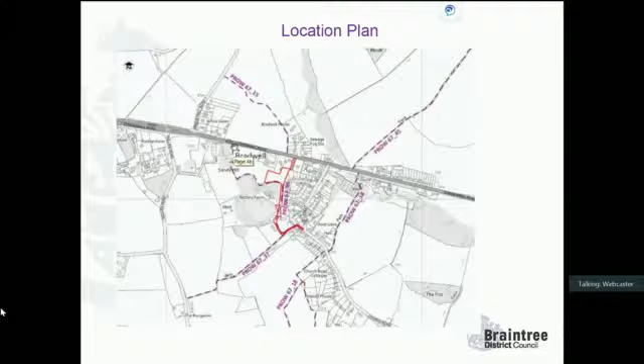In terms of the location plan, a larger view showing context - these are properties here that front onto Coggeshall Road. The location of the housing would be in this portion of the site, with existing properties in Forge Crescent and Chapel Rise to the east.

In terms of the site layout, layout is sought at this stage. There are 6 units altogether. Plot 1 is proposed to be a bungalow, and then you've got 2 four-bed detached houses and 3 two-bed terraced houses. All of the properties meet the requirements in terms of garden size, back-to-back distances, and are all served with parking to meet the adopted standard.

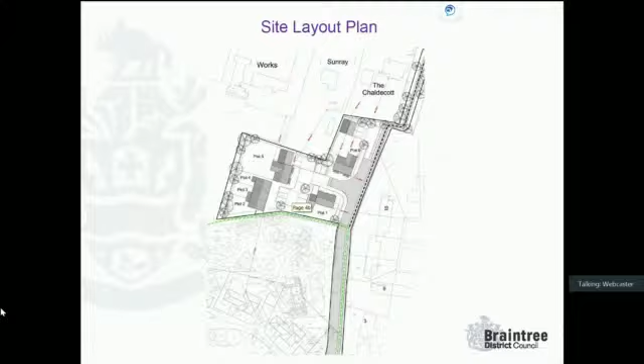This layout shows the same as before, but as part of the officer report, you will see that there is an outline planning permission just to the south of the site for 3 units. That was granted on appeal, and it remains extant.

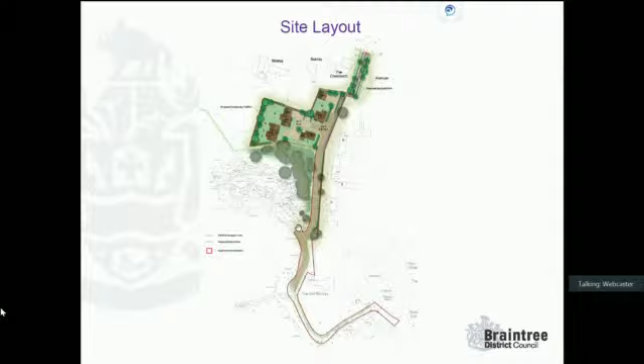In terms of highways, Coggeshall Road is this side of the site. They're proposing a 2-metre wide footpath that will link up to the footpath along Coggeshall Road. The public rights of way, shown here in green, would remain unobstructed, and the new formal footpath would run all the way up the access and then connect to the pedestrian access out onto Coggeshall Road.

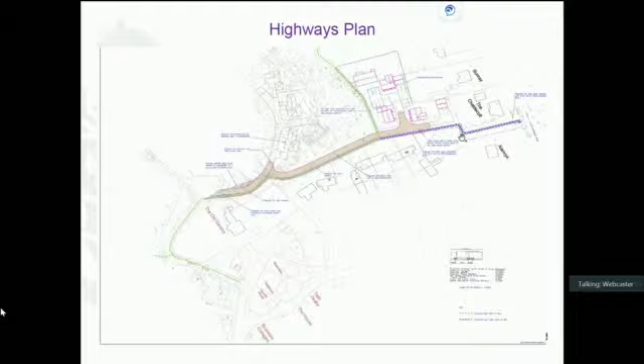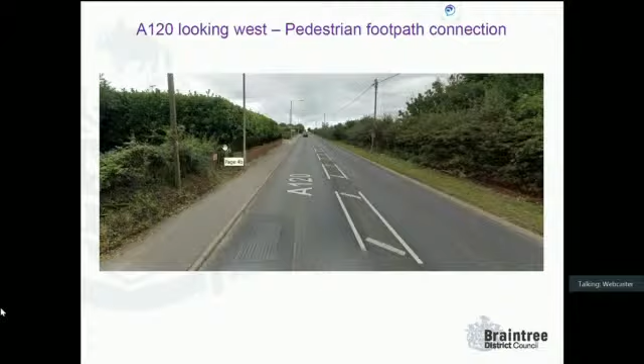In terms of where the public footpath would connect, this is a view looking west along the A120 along Coggeshall Road, so the footpath connection would be approximately at this point. Taking a view further back, this is the junction with Riverside, and the pedestrian access at the point where the red line is shown. Looking the other way, east along Coggeshall Road, again showing the location of the proposed pedestrian access.

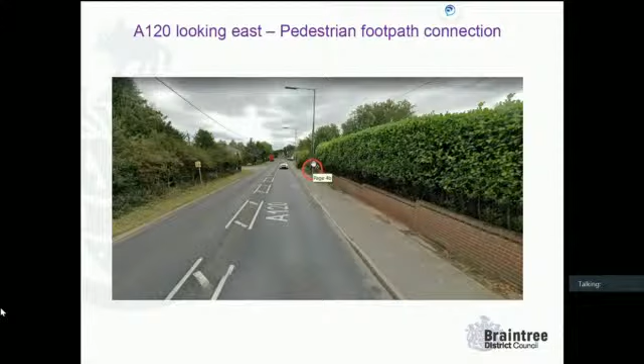In terms of the planning balance and recommendation, there is a conflict with the development plan and the Section 2 plan, given the site is located in the countryside, so it's beyond the settlement boundary, albeit adjacent to it.

What we do have to consider is Policy 7 of the neighbourhood plan, which forms part of the development plan, which does allow for small-scale residential development beyond the settlement boundary as an exception, where it can demonstrate significant contribution towards maintaining the future viability and sustainability of the settlement, and also where such sites are located next to a settlement and don't provide for linear extension. In this case, officers would consider it is adjacent to a settlement boundary, and we don't consider it to be a form of linear development.

There are 6 units, which is not insignificant. It would help to maintain the future viability of the settlement, with extra residents using public transport and the facilities available in the immediate location. There are limited facilities in Bradwell, but there is provision of bus stops offering onward connections.

When the planning inspector was considering the sites to the south, they concluded that although private car journeys would be generated from the development, it would not be wholly reliant on the use of the private car, with other sustainable modes of transport available within acceptable distances of the site, and there's no reason why we would take a different view for this site. Also, the pedestrian access through to Coggeshall Road makes that a bit easier. There are no highway concerns for either pedestrian or vehicular access, with both National Highways and Essex County Council having been consulted and raising no objection.

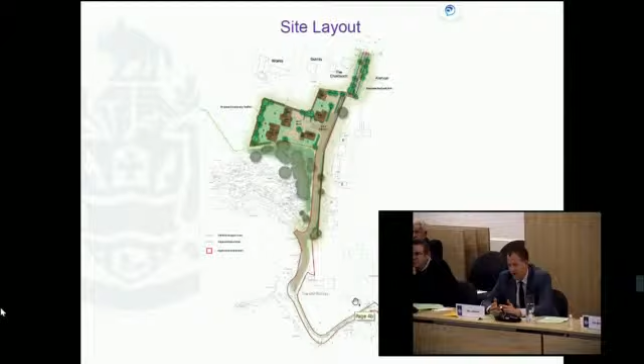Thank you. My interpretation of linear would be like a ribbon along the road. So, for example, if it started here and then you had one by one that followed the road round. This is more like an enclave or a group of housing. It doesn't follow the road, which is what a linear fashion would be.

Okay. Does anyone else wish to raise or mention any other point? I think Councillor Abbott - it's been moved and seconded. Our officers agreeing we can have some form of wording to strengthen the construction access issue. Yes.

It has been moved by Councillor Mrs Spray and seconded by Councillor Mann with the additional condition regarding the construction traffic requirement notice or agreement with officers. All those in favour? Those against? One against. So that application has been granted.

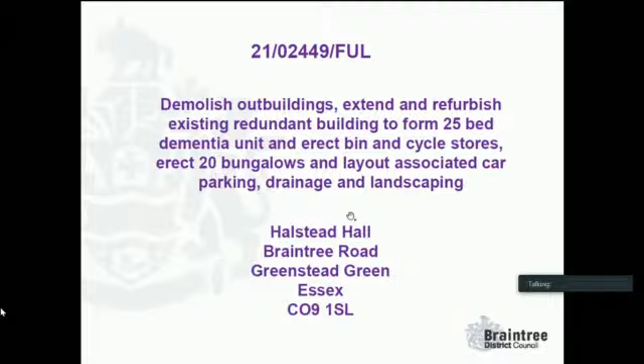So this first slide is the site location plan. It looks better on my screen than yours. I do apologise. I wonder if we can turn the lights down a bit more. I have to ask you to do it because it looks a bit technical, that light switch.

Any better? Shows it up a little bit better. So the application site is ringed in red.

To the north of the site is Halstead Hall, the existing care home. To the left is the property known as Green Lodge, referred to within the committee report, and the land in blue is other land owned by the applicant. To the right is the existing development on the Oak Road site, the Bloor Homes portion. We can make out Marler Road here, Hurrell Close here, and Oak Road is just off the page up here.

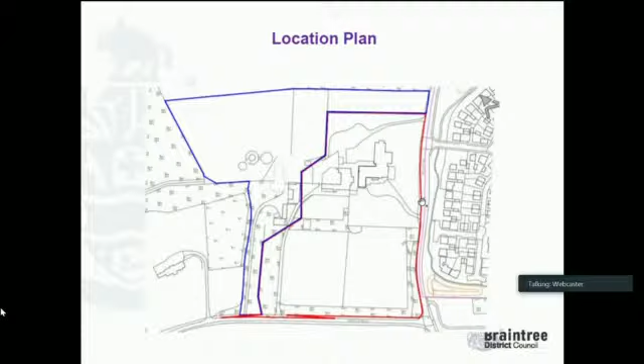To the south, running directly to the right-hand side of the application site, is the A131, which runs to Halstead in one direction and Braintree in the other.

This next slide shows a site plan of the proposals, taking the works to Green Lodge. You can make out the existing footprint of Green Lodge, broadly an L shape, with proposed extensions that will close in the building and create a courtyard within the middle.

We have 2 areas of new car parking, and within the more open portion of the site, during the life of the application, the number of dwellings proposed has been reduced from 30 to 20, with some other amendments to layout. This has meant that all back-to-back distances now comply with the Essex Design Guide, and all properties have the relevant amount of private garden space and off-street car parking.

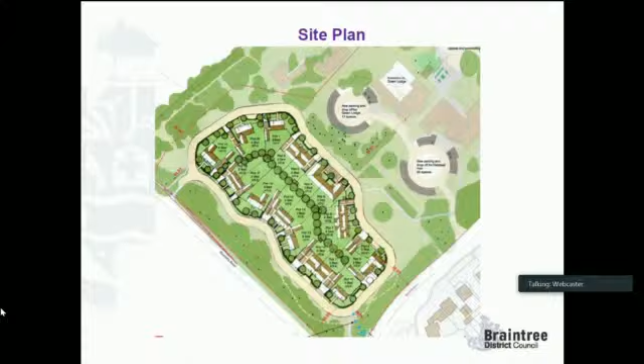The next two slides show different site accesses. The first is the site access onto the site from Russell's Road, with the relevant visibility splays shown, and highways were satisfied with the access arrangements here.

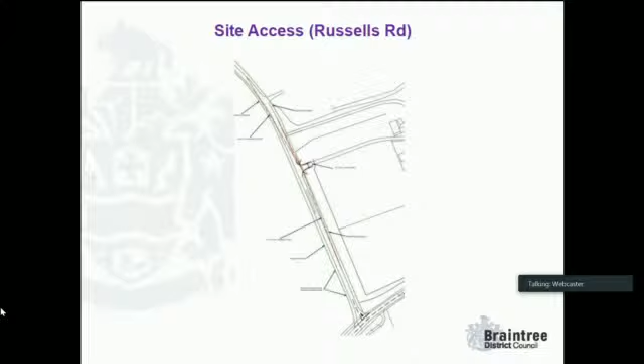They also raised concerns about the additional capacity at the access between Russell's Road and the A131, and again, visibility splays were demonstrated by the applicant to show that vehicles could exit Russell's Road in a safe fashion.

The next few slides show details of the proposed dwellings. We've got floor plans of 4 of the dwellings here, plots 2, 3, 11 and 12 - 2 pairs of semi-detached properties, with elevations shown. These ones are bungalows.

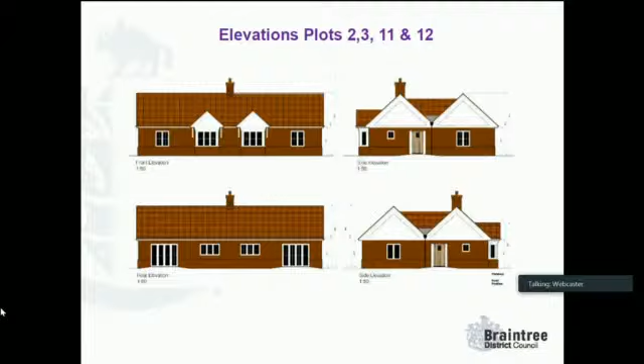The next slide shows the larger bungalows, plots 6 and 7, and again the relevant elevations.

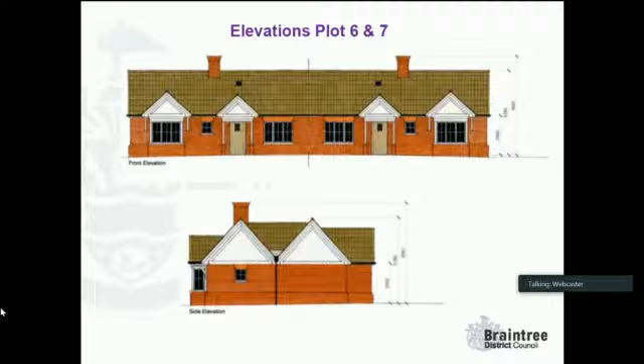The next slides show the floor plans for the 1.5 storey properties, plots 1, 9, 10 and 13. We can see they're 3-bedroom properties, with the corresponding elevations.

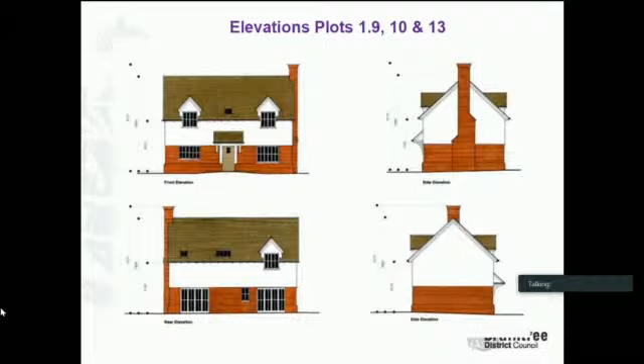These are the largest properties on the site, again 1.5 storey, with the corresponding elevations.

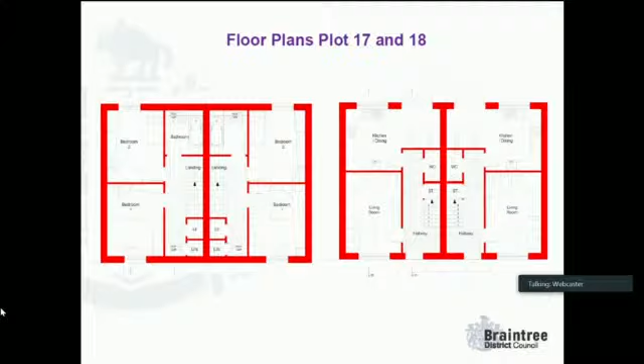This is a pair of houses, properties 17 and 18, which are 2-bedroom, 1.5 storey properties, and the corresponding elevations there.

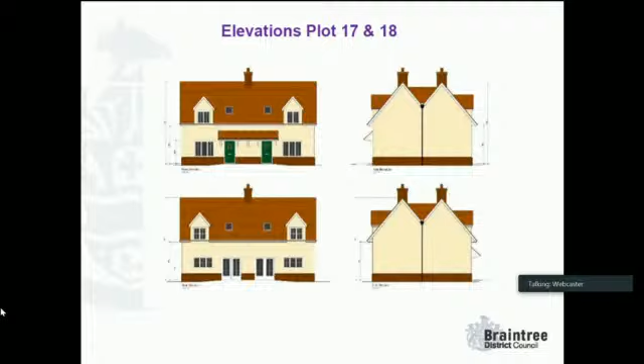This next slide shows the front elevation, which will broadly stay the same, and then the 2 side elevations, and this new rear elevation, which joins up the 2 corners of the building.

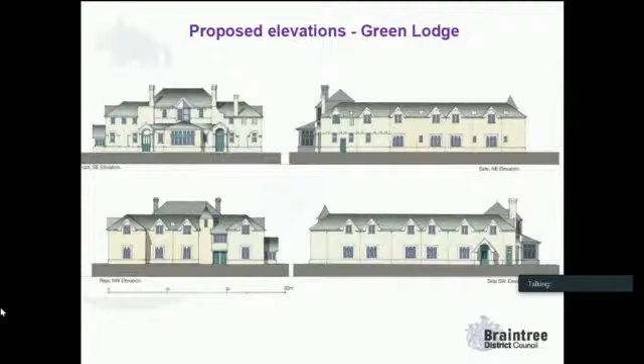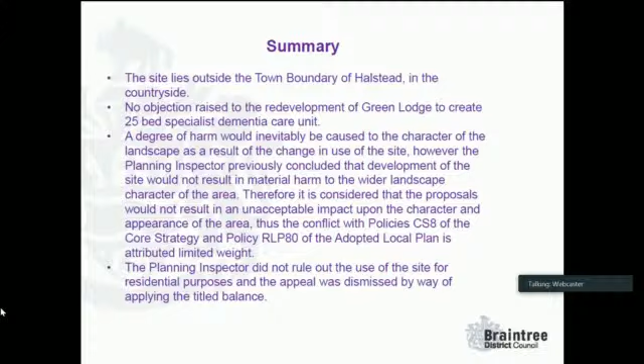The planning inspector did not rule out the use of the site for residential purposes, and the appeal was dismissed by way of applying the tilted balance. The council can currently demonstrate a 5-year land supply, albeit marginally, and there is a need to maintain this supply.

In light of the planning inspector's previous conclusions, and given the adverse impacts previously identified by the inspector have now been overcome, it's considered that when applying the flat planning balance, it is recommended that planning permission is granted for the proposal. This is against the context only of moderate weight being given to the conflict with RLP2, and given that the proposal does not wholly conflict with CS5 of the core strategy, given that the inspector did not rule out the site for residential purposes.

Happy to answer any questions.

Thank you, Mel, thank you very much indeed. Members, I could just about see you all. Oh, should I turn that back up? A little bit, please, it would help. I think it might help me a bit. Councillor Radley. Monday, sorry, I can't see your name. I was going to say, Councillor Radley is definitely not here this evening. No, sorry, thank you, Chair.

First and foremost, I do have a question that one of the speakers brought up, about the permission to grant the dementia care unit, but there's no weight given to the district council actually making that proposal come to fruition. So this is saying that we could grant a 25-bed dementia care unit, but it may not be built. I don't understand where our authority can grant something but not have any reflection to make it come to fruition, and therefore why are we even considering it.

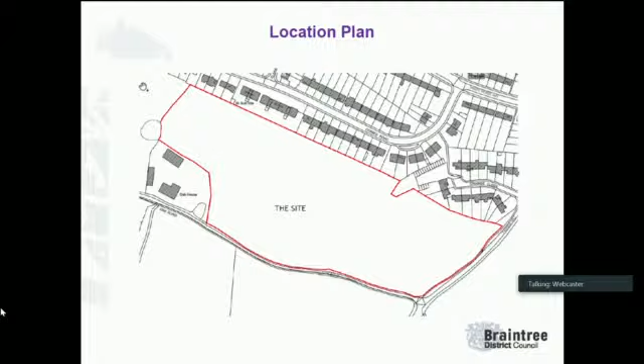So this is the application site. Oak Road runs along the south boundary of the site. This is Tidings Hill, which Councillor Pell referred to, where vehicular access will be formed from. And then you can see the existing edge of the town. We've got Coney's Road and Grange Close just to the north. This is farmland further to the east on the other side of Tidings Hill and to the south of Oak Road. Oak House here is a residential property which has also got a spa building at the back, so there's a business running from there. And then this is an undeveloped field to the west here.

So the site location, the site is on the southern edge of Halstead. What this plan doesn't pick up is the development on Oak Road, which Councillor Beavis mentioned earlier. This was a scheme which was approved, obtained by Gladman, and has been built out by Bloor and David Wilson. So that's the town moving to the south already.

This site, as you've seen from the report, already has an outline permission. Usually what we'd expect is an outline permission is granted and then a developer comes along with reserved matters. What's happened with this particular application is the applicant who purchased the site following the grant of outline permission looked at the site's capacity, felt there was scope to increase the numbers to make efficient use of the site in an acceptable manner, and that's why a full application has been made. So whilst we're mindful of the outline permission that was granted previously, this is a full application with all details. We're not relying on the outline permission.

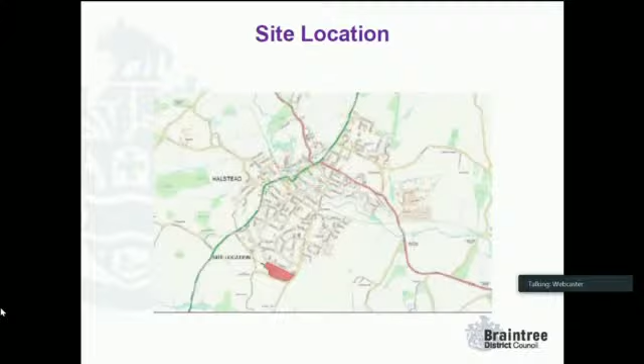This is the site plan. Again, just for bearings, this is Oak House over here, and this is the spa building just at the back here. There's quite a strong, tall conifer hedge running around the edge of the Oak House boundary, and an existing hedge running along the southern boundary here. No vehicular access is being proposed onto Oak Road.

This is the vehicular access point here off Tidings Hill. There's an additional pedestrian connection which we're looking to form off the garage court off Grange Close, to provide additional connectivity. There's also potential for a connection to the west should that site come forward in the future. But this is the development, so you can see effectively two parcels, with a field boundary running down the middle here. The road comes in, parcel 1 is here as a development, and then parcel 2 is on the western side of the boundary.

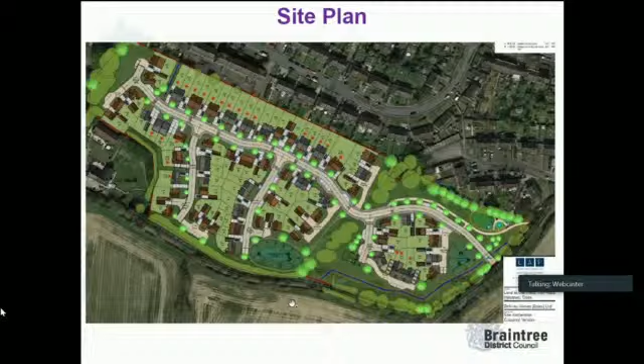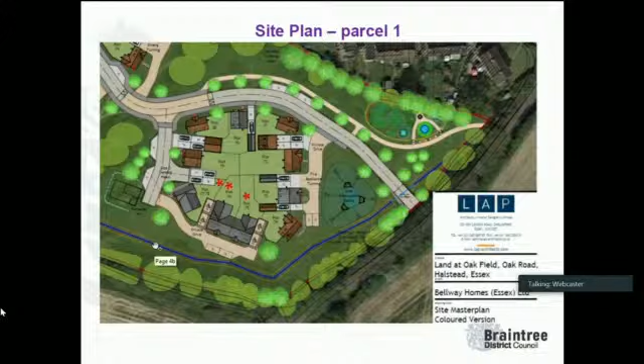There's been a very healthy discussion about what the NPPF is talking about in terms of tree-lined streets. Certainly officers took a different view to the developer, but the resulting scheme is one which we're both comfortable with, and we both think complies with and is appropriate and provides a different sense of character and appearance as you move through the development.

The trees are all to be either in land which will be owned and managed by the Highway Authority or by the management company. So these aren't trees which are within, we're not relying on street trees being within people's gardens where they may be removed in the future. So we're consistent with the NPPF there, which says where street trees are provided, there needs to be suitable long-term management arrangements for them.

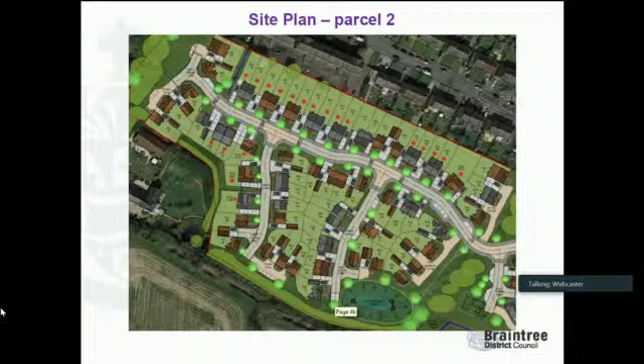Affordable housing is being provided, 28 homes being provided. That's 35% of the total number on the site. Ordinarily, on a site on the edge of a town like this, we'd be looking at 30% provision. The outline permission was granted on the basis of 40% provision. So 35% is over the level which we would usually seek, but less in terms of a percentage than was secured with the outline permission.

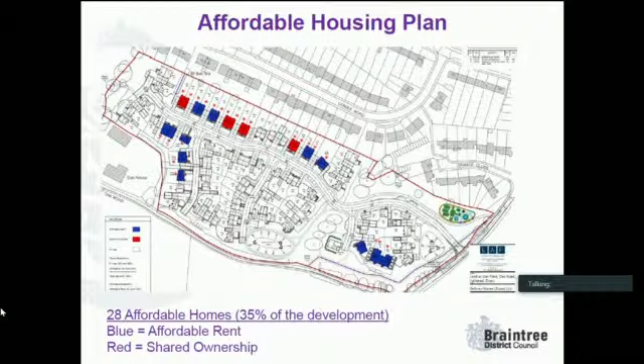Although if the lower number of dwellings which was permitted by the outline permission, which was 70, was to be built with 40% provision, that would be 28 affordable homes. But as you can see here, we've got a mix of shared ownership and affordable rent spread through the site, which the Affordable Housing Officer is happy with, and the affordable housing mix is agreed.

There's a lot of house types, as you'll have seen looking on the website, so I haven't tried to show them all on the presentation because it would take quite a long time. But just as a sort of flavour, I've got some 1, 2, 3 and 4 bed properties just to show.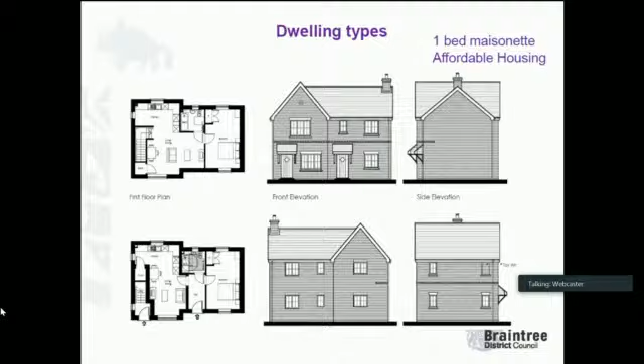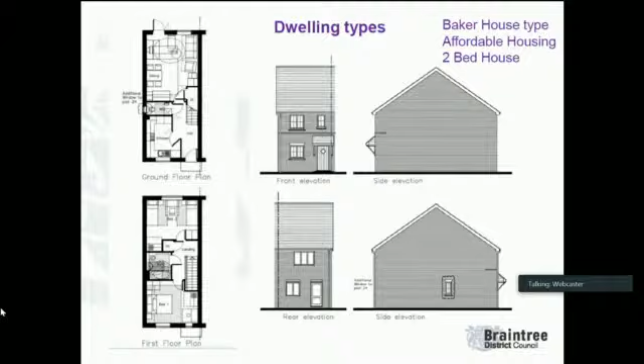So these are the 1 bed flats which have been provided as affordable housing. These are 2 bed flats, again part of the affordable housing provision. There's a couple of different types of this - one version where we've got render to the front with brick quoining, but there's also just brick versions. And this is a 2 bed house, again part of the affordable housing provision.

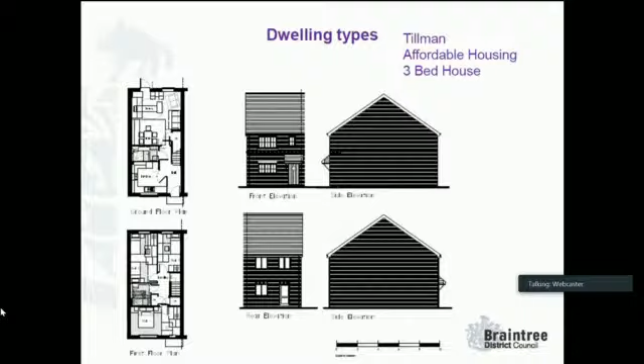And then 3 bed property is just an example. That's one of the market properties. That's the same house type, but that's got a weatherboarded front compared to that one, which is brick. 3 bed semi-detached houses. And then we've got 3 bed affordable house, just an example.

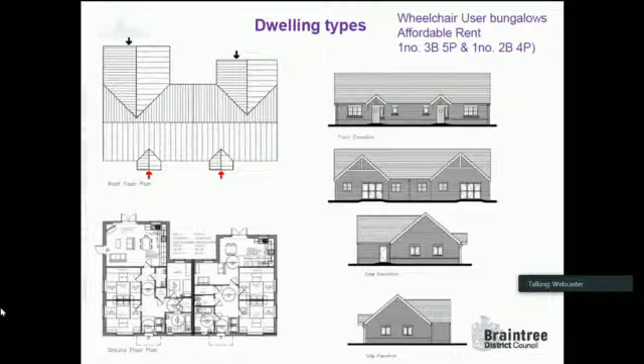Bungalows. So we've got 2 market bungalows for sale, which are 3 bed units. That's unusual to be having a developer which is offering bungalows for market sale. And then we've got 2 wheelchair user dwellings as well, bungalows, 1 3 bed and 1 2 bed, helping to meet the need for that particular type of property.

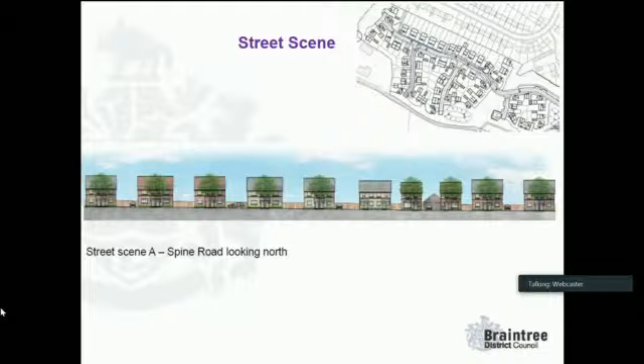So there's a number of street scenes which have been provided, which attempt to give a visualisation of what the streets would look like and the houses together. So this is looking along the northern boundary, along the Spine Road, looking along the top here. And then this is the south side of the same street.

Then we've got the shared surface street. This is looking to the east. And the private drive looking west, so if you're looking from the open space here, looking back into the site. Just to point out, that bungalow there is that bungalow here.

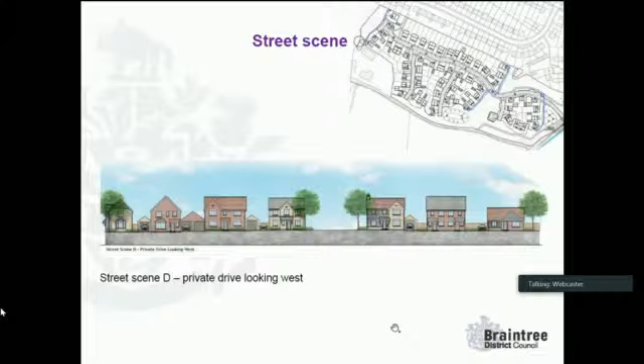So officers were concerned about properties being constructed too close to the backs of the properties on Coney's Road. So where there's a particular sensitivity here, these 2 properties are the market sale bungalows which I referred to. And then this is the private drive on the eastern boundary as well.

And then these are some CGIs which the applicant's provided. So this is standing on the footway coming into the site with the play area on the right-hand side. And this is sort of parcel 1 here. You can see the street trees planted running along both sides of the road.

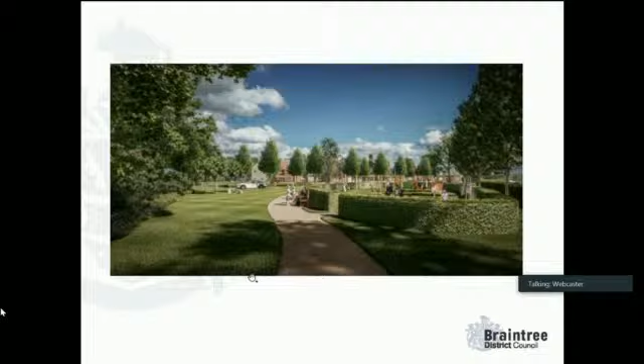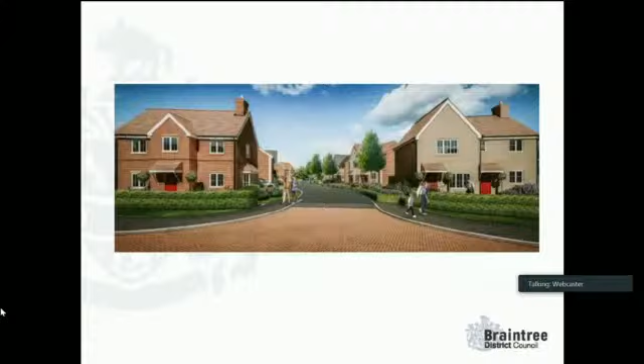This is one from the SuDS basin, so this is in parcel 2, sort of at the bottom of the site, looking up. So this is the road running through between parcel 1 and 2. This is the houses looking at the open space. And these are some other images of the streets as we move through - you'll see the street trees here on the main street and lower order streets here.

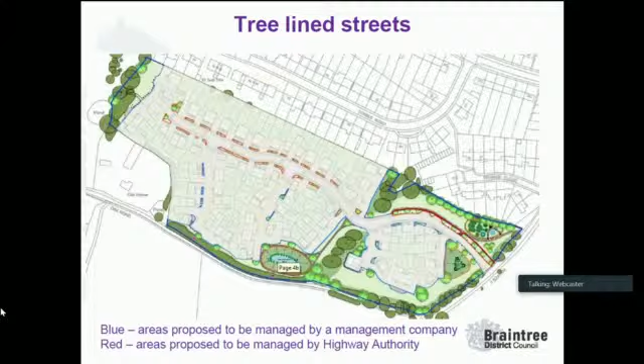So in terms of the access of Tidings Hill, obviously this was our starting point in terms of discussions with the developer. When we looked at the access, it wasn't approved as part of the outline, but indicative or illustrative information was provided. An access was shown which showed 7 trees being removed on Tidings Hill for a number of reasons, including the excavation of the ditch opposite by the farmer, which they were entitled to do, but which impacted the ability of the road being widened.

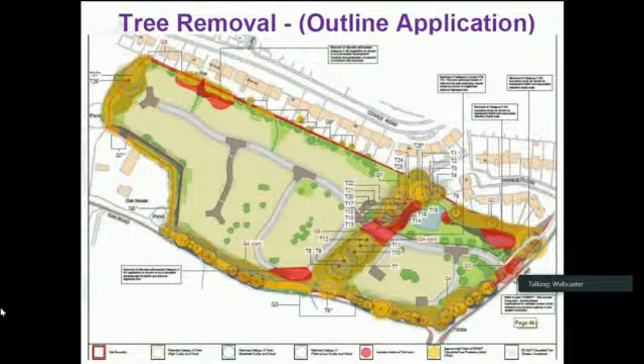We've had to reconsider how the access is formed, and as the agent who spoke at question time referred, a number of different locations have been looked at along Tidings Hill to try and find a solution which works in terms of highway safety, providing suitable visibility along the road, but also minimising the loss of trees. So whereas the outline permission envisaged the loss of 7 trees, regrettably 9 trees would be lost as part of this proposal now before us.

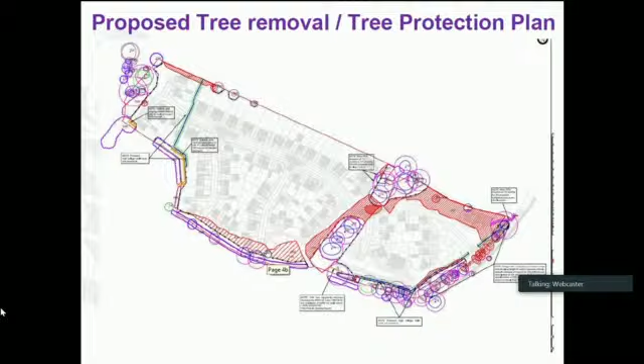So this is the tree removal plan, tree protection plan. You can see the red areas are the trees or areas of vegetation being removed. We've tried to set out within the committee report in more detail what is being removed, being clear where we can about the larger trees, the identified trees. But there are also some groups of vegetation proposed to be removed. Mindful that members want a good understanding of what is being removed, the applicant has provided additional information to show what some of this vegetation is.

So what we're looking at here, for example at the back of Grange Close, is predominantly blackthorn and hawthorn scrub which will be removed. Along here we've got self-seeded scrub at the back of the hedge which will also be removed. We've tried to be as clear as we can in the committee report about what is being removed.

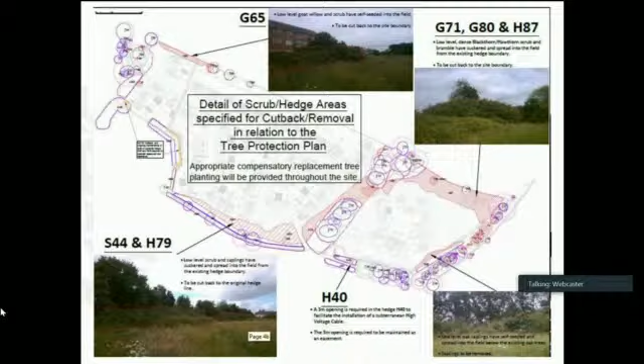So this is the southern boundary, which I think was being referred to, with additional planting there being planted along there. I'd have to say, having been out, I think there are some gaps - they're not great from my recollection from being out earlier today and previously, but there are some gaps.

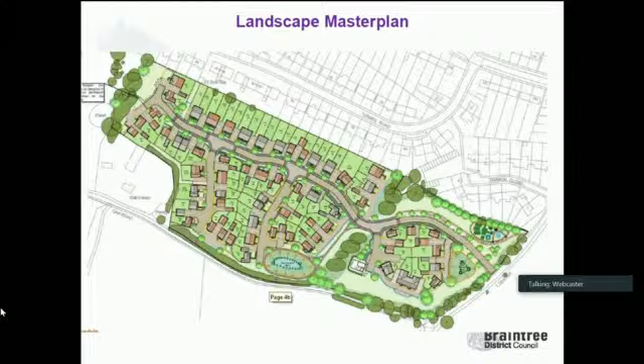We do have a landscaping condition, condition 28, which would provide the detailed landscaping planting, building on the master plan. If members were particularly concerned about that southern boundary, given the concerns raised by the Parish Council, we could certainly put an informative on which says we'd expect to see additional planting to plant up any gaps along that boundary, and also to think about the planting put there, because the point was raised about screening during winter months, so perhaps more evergreen planting could be considered as part of a native mix. But there's certainly a condition already that covers landscaping.

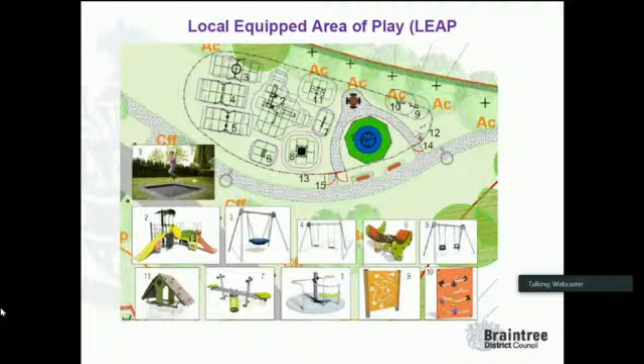This is the play area that's proposed. The Town Council did raise concerns as part of their earlier representation about accessible play equipment, and the applicant has amended some of the play equipment to provide more accessible pieces. So we're broadly happy with what's proposed there.

So one was with regards to this application was quite long, so I do apologise for its length and also that it came out today. But I will spend a couple of minutes going through that just to make sure everybody's aware.

Firstly, a correction in our report. I'm afraid to say we've incorrectly reported the status in the emerging local plan. We said it wasn't included within the Section 2 plan. It wasn't included in the version that went out for publication and was consulted on, but it has been included as part of the main modifications. So where we've said there was a conflict with the Section 2 plan, which we said was neutral in weight because of the outline permission, actually we need to acknowledge that this is included within the Section 2 plan - not part of the adopted plan still, because Section 2 hasn't been adopted, but part of the emerging plan. So that neutral harm or benefit is probably more of a benefit by virtue of the fact this is a site proposed to be allocated.

And then in terms of other conditions, we're proposing to remove condition 3, which was the archaeology condition. The site investigation has been done and we hadn't received a report concluding what was found. That has now been provided and approved, so we don't need that condition anymore.

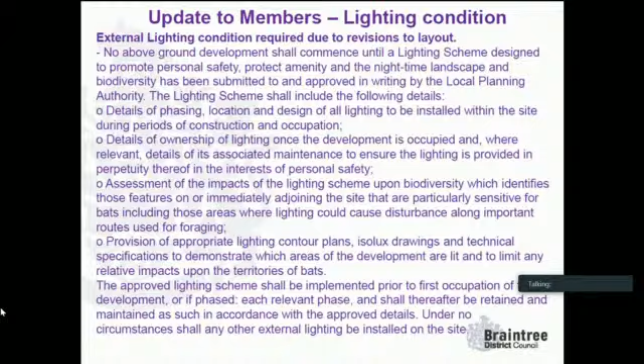We need to add, we recommend adding, an external lighting condition. We did have an external lighting scheme provided which we're broadly happy with. The layout has changed slightly, but the lighting scheme hasn't changed with it. So we need to make sure we've got a correct lighting scheme for the layout we're looking to approve. So we recommend adding an external lighting condition.

And then just some typos, I'm afraid, on some of the approved plans listed. We haven't changed what's on the website, we're just updating how we've recorded them on the approved plans list. So apologies for all of those.

And then we did say we would update members on a couple of points regarding financial contributions. We can confirm what the outdoor sport contribution will be and the allotment contribution, now we've re-indexed those. There's also a minor point about how we're drafting the library's contribution - it doesn't affect the total amount to be paid if 80 dwellings are built, but just for completeness we're reporting that because the county council want the obligations set out slightly differently.

Within the agreement, we're also recommending we add a refuse collection obligation, which makes sure the operations team at the council can go onto the estate roads and collect refuse, having the right to do that, and that if any damage is done to the private roads where we use them reasonably, we won't be held liable for that. So that's an additional obligation we've added.

So just quickly, in terms of harms and benefits: we still have that conflict with the adopted development plan, conflicting with RLP2 and CS5. But as we've updated you, the conflict isn't there with Section 2 because it's proposed to be included through the main modifications. So assuming that happens, it will be part of the emerging plan. We previously reported this harm as neutral - as I said, arguably it should be seen as a benefit in terms of the site coming forward as part of the Section 2 plan, so delivery of a plan which we've allocated or will be allocating for development.

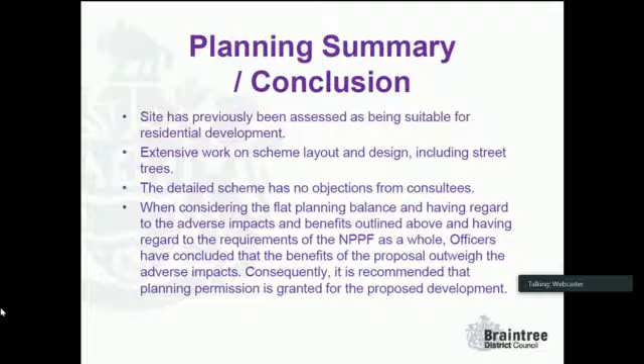Thank you, Neil, for a very detailed presentation, especially with all the additional information we've received this afternoon. Members, I'll get it right this time. Councillor Monday. Thank you, Chair.

First of all, I have to acknowledge that there is outline permission for 70 homes on this site, so the precedent for building is there. I'm not going to argue against that. I just have a question: the outline had 40% of those 70 homes as affordable, yet now we have the same 28 affordable homes, in effect, on 80 houses. What's changed? Why was the precedent set at 40% and now it's down to 35? Why did the planning authority not take 40% and make it 32 homes? Just a question. All I can see here is 10 extra homes for the developer to make a substantial profit on.

I do acknowledge Councillor Powell's statement that Tidings Hill is really narrow. It is not a very good road to traverse up or down, and I worry about the amount of construction traffic going up and down Tidings Hill, which I consider quite dangerous. I accept that 70 homes for outline has already been granted, so there's not much we can do about that. There will be construction traffic, but I wonder how you're going to ensure that traffic goes down Tidings Hill, because it certainly can't come through Oak Road.

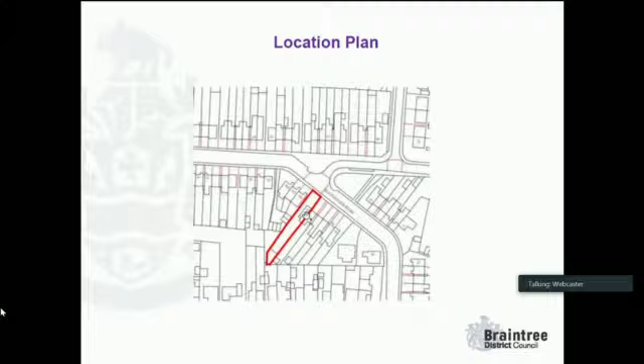These are the existing floor plans of the property - looks better on that one. We've got 2 bedrooms upstairs and a bathroom, and the bathroom at the moment sits within a cat slide roof, which will become more apparent when we look at the photographs.

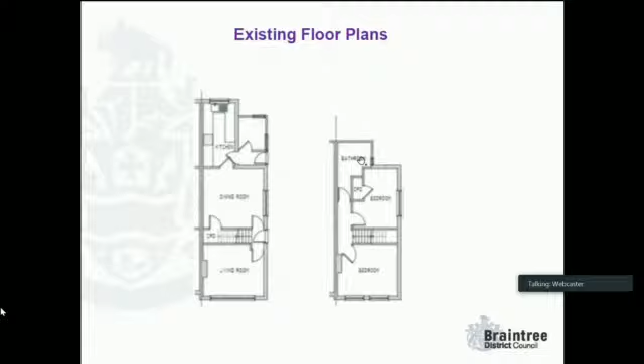These are the existing elevations. So that bathroom I was talking about sits in this space here, in the cat slide roof that drops down.

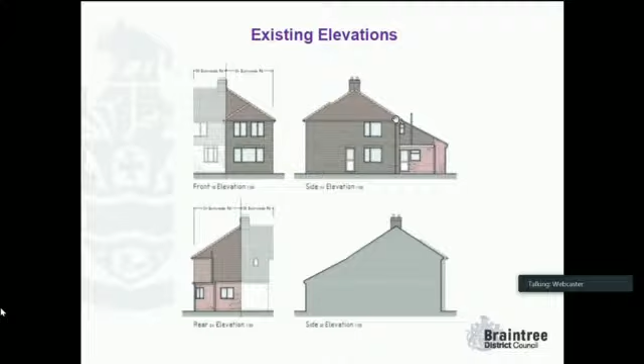The proposed elevations - this is the proposed first floor extension, and then we have a single storey extension that extends out along the boundary with the neighbouring property.

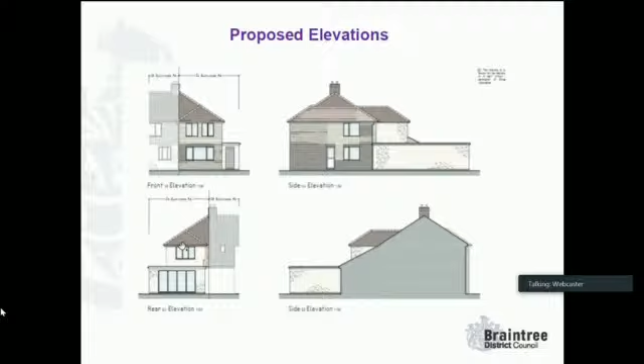This is the view from the rear. Again we can see the first floor extension here that will accommodate the second bedroom, which will be slightly larger. There isn't actually an increase in bedrooms, it's a reorganisation of the first floor, as this plan shows - the large open plan living kitchen area at the back of the property, and upstairs the bathroom moves to a central position, and bedroom 1 becomes slightly larger at the back, but it still maintains just those 2 bedrooms upstairs.

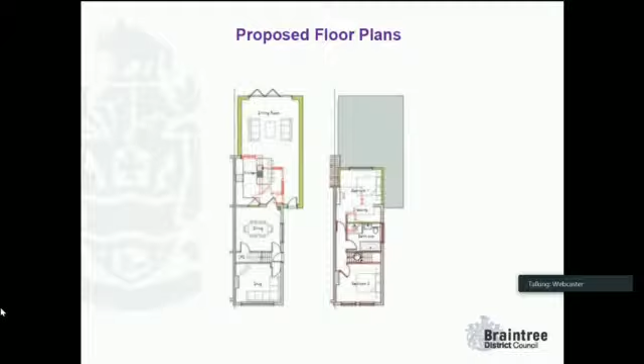Officers consider that the proposed extensions are of an appropriate size, scale and design and layout, and would be in keeping with the character and appearance of the existing property and those within the locality. No detrimental impact would occur to neighbouring residential amenity or highway matters. Officers conclude that the proposed extensions would be acceptable, and it's recommended that planning permission is granted.

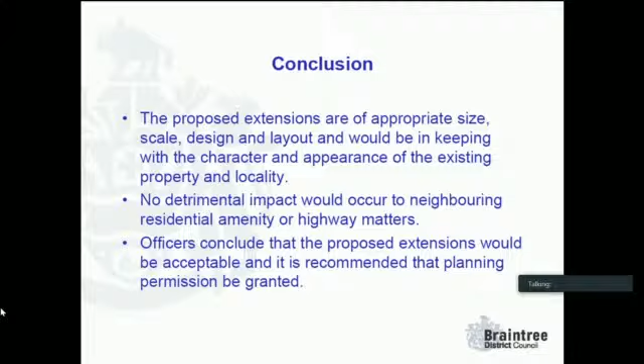Councillor Ms. Parker: Thank you, Madam Chair. Thank you for the presentation. It seems to me that often with these sorts of applications, the main issues are whether there's any impact on the neighbours, particularly when you have a semi-detached, and also whether there's any sort of adverse impact on the character of the street scene and the property itself. I think in both those respects, perfectly acceptable, so I'm happy to move approval.

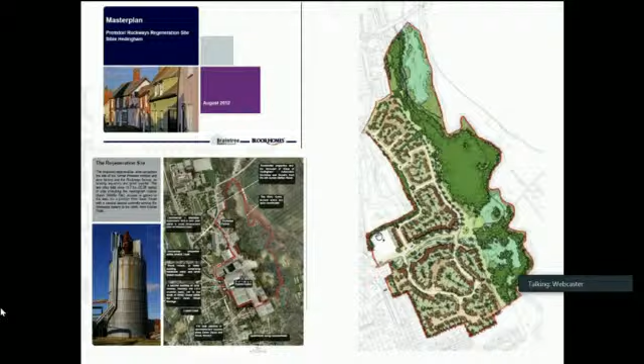In terms of status of the site, a master plan was approved prior to the permission for the redevelopment of the site, as part of our supplementary planning guidance. We've got a master plan document which identifies the land in white for that community use, as they termed it, the medical centre and employment use. You can see the extent of the previous factory site has all been built out now, redeveloped as housing. This is the last part of the overall factory site to be redeveloped.

This is the work hub, in terms of its surroundings. This is the building, a two-storey building, a prominent gateway feature coming into the site. The medical centre site is this bit around the back off Osier Way, and this bit off Bewick Court here.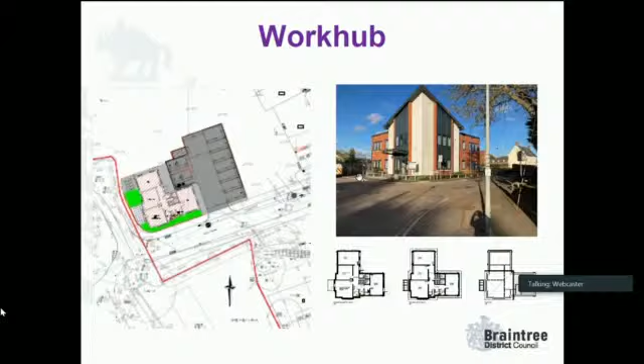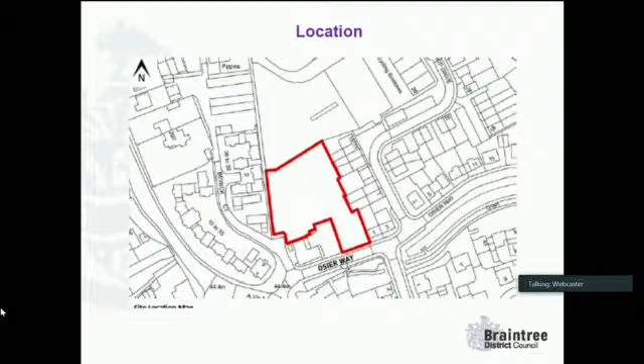In terms of important issues we need to cover, at question time Mr Ward referred to the red line and the public highway. If I flip back to the location plan, you can see the red line adjoins Osier Way and Bewick Court. Mr Ward was quite right.

Osier Way isn't adopted public highway. We've checked with highway officers this afternoon. It's still in the process of being adopted, so not all of the estate roads are in that process at the moment. But certainly this part of Osier Way is, though as it stands it's not public highway. However, the red line does adjoin Bewick Court. In terms of validity of the planning application, we think this is okay, and the red line does provide access onto the public highway.

In terms of the vehicular entrance onto Osier Way, when the medical centre was transferred to the District Council, we were granted rights of access over Osier Way, so those rights are secured, and would transfer to One Medical Group, so we can be confident there would be public access available off Osier Way.

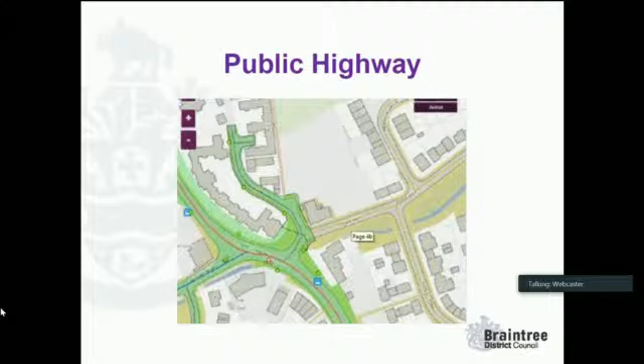In terms of the application proposals, you can see this is the work hub building down here. The medical centre building is proposed to run this way, going back across the site. There'll be an entrance at the back, a vehicular entrance providing access for the staff parking spaces at the back of the building. Then the main entrance will be off Osier Way down here. You can see the parking arrangement coming through here. There is the ability to loop around, but public access would be through here.

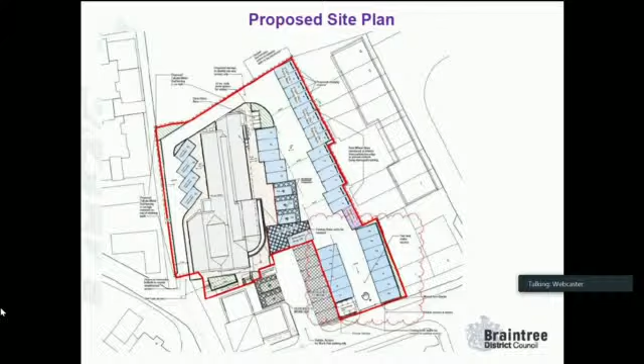In terms of the building, as officers we're very content with the design. We think it has a contemporary appearance and is quite well considered. Good efforts have been made to break up the mass of the building. So it is quite a large building, but it's been designed in a way that gives it architectural interest and visual interest, and overall we think it's a success.

The proposal is for a mix of materials: red brick, elements of white render, aluminium windows and doors with pressed metal surrounds, with the colours picking up those of the surgery, the business colours of the surgery. There's a timber structure providing this entrance feature with landscaping above, and a reconstituted slate roof.

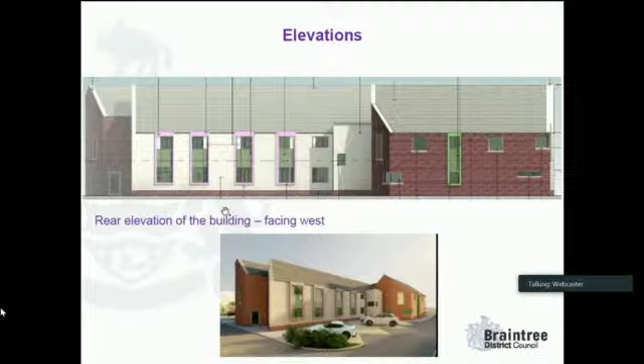This is the rear of the building. You can see here at the bottom an image showing some of the staff parking spaces. This is the back of the building, a CGI as opposed to the coloured elevation. And then the ends of the building.

So this is if you stood on Bewick Court looking up here, this is the end of the building. This is the pedestrian access, so you could come up Bewick Court and walk into the medical centre without necessarily walking through the car park. And then this is the north elevation, which borders the commercial land to the north.

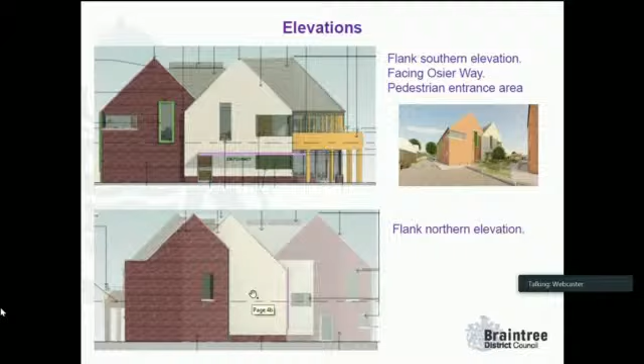So you'll have seen the floor plans. They don't produce particularly well, but you can see here the main points: the visitors' entrance here, a waiting area and reception area here, pharmacy at the front, and then consulting rooms and clinical rooms running back.

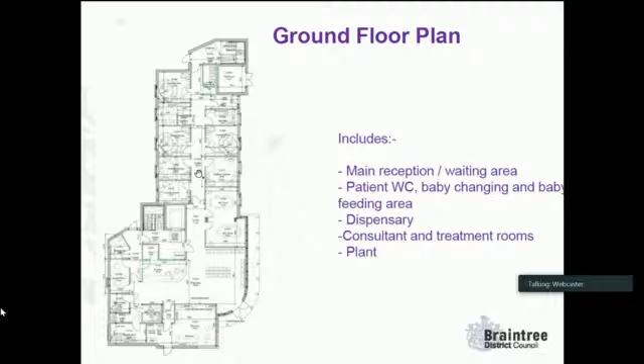And then on the first floor, secondary waiting rooms, clinical rooms, and staff and office space.

So the roof form is quite interesting. This is probably the best image to look at, the CGI. You can see we've got roof slopes, but within the roof form we've got solar PV panels, and we've got a condition to make sure those are secured, so details of the panels are to be provided along with a requirement that they are provided.

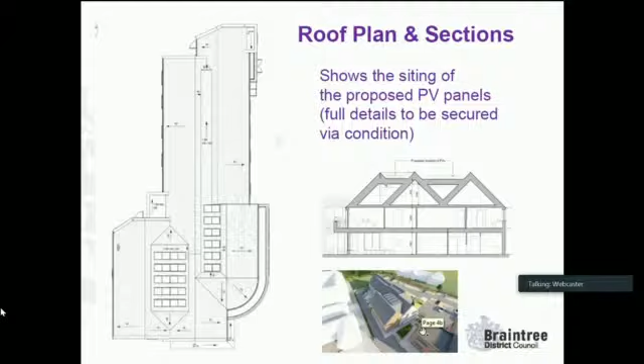And then there's just a refuse store area, in terms of appearance of buildings and structures. That's at the front here, so the refuse collection operator can easily collect from the site, but it's done in an appropriate manner where it's screened.

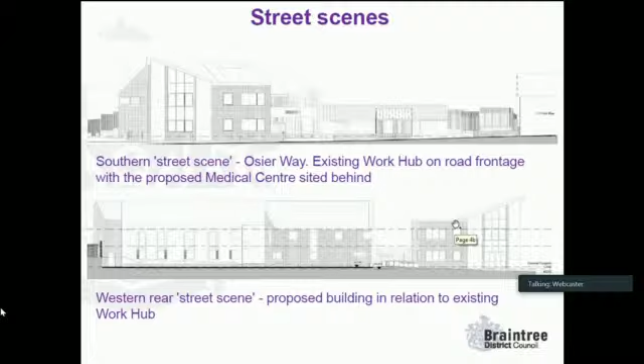So, as I said, there are 2 points of access into the site. Parking is the main issue, which I'll probably try and concentrate on, because that's what has caused a number of concerns to be raised.

In terms of provision, as you'll have seen, we've tried to set out within the report what the situation is with the parking provision. I think the first thing to stress is that parking standards for this type of development are maximum standards. Whereas with residential development we have minimum standards, here we have maximum standards. So what we've done is worked out, applying the parking standards, what the maximum requirement would be. The requirement there would be 56 spaces.

What the applicant is proposing is 38 spaces on site, 12 allocated for staff use and 26 for patients. Overall, against the maximum standard, that leaves a shortfall of 18 spaces.

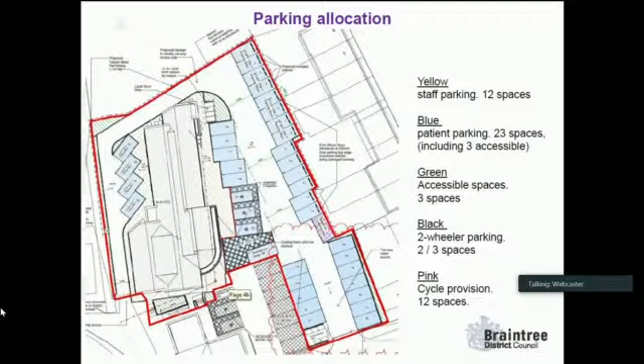Just briefly to touch on this, there's been a lot of discussion with the applicant about the parking arrangements. All of the parking bays comply with the council's adopted parking standards, so we haven't tried to use smaller bays which people would find difficult to use. We've also tried to make sure the parking bays are arranged within the land available in a sensible manner, so that there aren't pinch points, restricted areas, or restricted forward visibility. We think all of the bays should be usable in terms of people getting in and out.

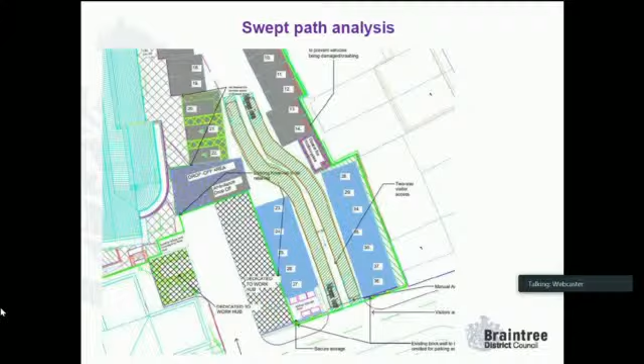This has been shown through tracking, and as you can see here, people will be able to pass through the development without conflicting with vehicles coming in the other direction. There are some examples of the swept path analysis which the applicant's done.